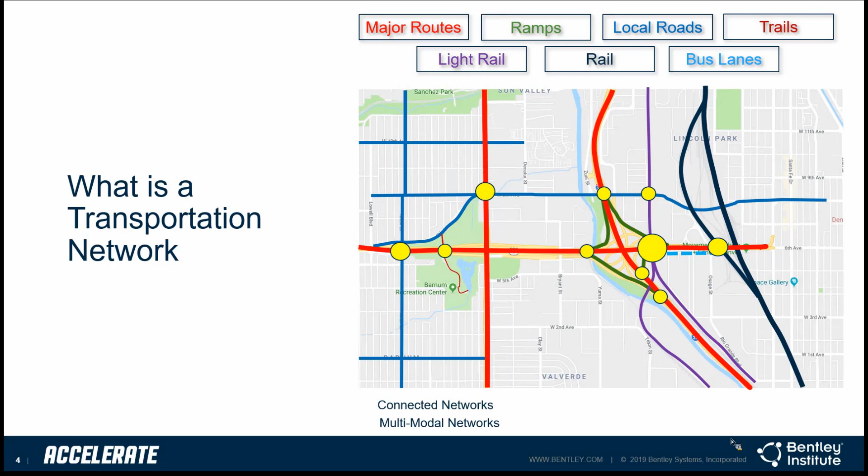So what is the digital twin of the transportation network? It's not just the topography, as you just saw in that map, and it's not just about the CAD model. It's about all of the information that relates to the network. So it's a combination of that network topography and the CAD models, but it's also information such as photographs and LiDAR information. It can also be information that relates to the operational aspects, such as borehole records, inspection records, condition information, and maintenance records. It can also relate to any other information about the status of those assets and information on the network.

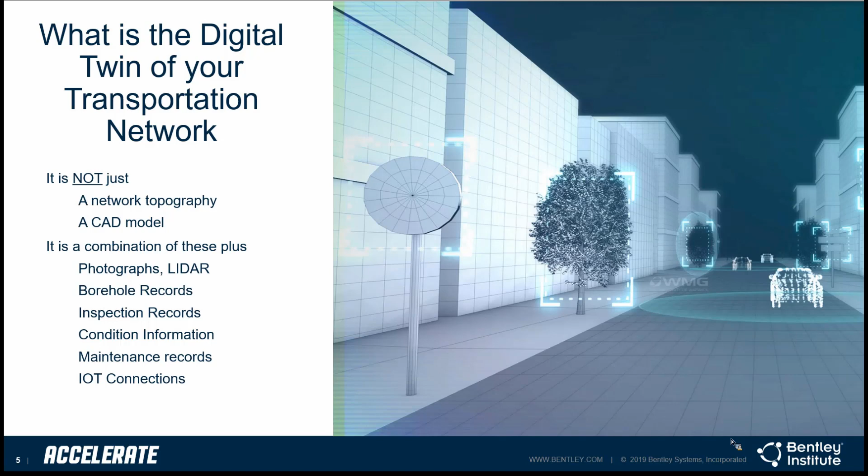That's information that's coming from IoT connections. So in total, the digital twin of a transportation network is any of the information that enables us to make informed decisions about the network and its associated assets.

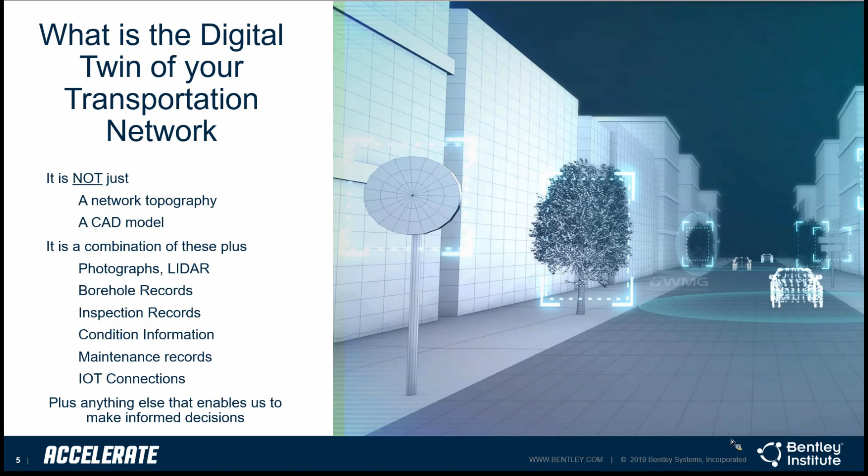So why is that digital twin critical? Well, it's needed to meet the industry challenges that more and more of you are facing. So if we consider things like reporting compliance, so in the developing world, HDM4 for information and HPMS reporting that the US DOTs have to face, this is being able to get all of that information and being able to assimilate it and use it for those types of reporting.

We also need it for user expectations. So as information becomes more freely available to members of the public, we need to increase our reliability. We need increased confidence about the decisions that are being made, and we need to start looking at behavioral patterns, such as the expected lifespan versus the actual lifespans.

We've also got an increased network usage, so there are more vehicles on our roads. Those vehicles are becoming heavier and longer, and there's also increased congestion, which also becomes more visible to the public.

There's emerging trends that are starting to cause challenges. So although ISO 55001 is more about the processes that we should perform, we're also then having to use those processes to start developing asset management plans. And some of those asset management plans are putting more pressure on us to do things like risk-based prioritization and cross-asset optimization, so being able to analyze the data better so that we can do those types of optimization.

So at Bentley, we start with a network. And some of the questions we're often asked is, why can't I just use the centerline geometry? Well, let's look at what the network consists of.

So first of all, the network itself is a complex asset. And that's because it's a network of connected and interrelated assets that work as one. It has numerous characteristics that change along its length, and it has numerous point or linear assets associated with it. So although each of those assets are individual items that we need to manage and maintain, when we put them together, they form the network.

So each of those assets dynamically change continuously along its length. The network itself has multiple connection points to other networks when we look at the multimodal type networks. And the network itself can be referenced in different ways. So for example, we might reference assets as a location from the start of a route, or they might be referenced as a point from a bridge.

And those routes might be overlapping. So in the industry, we refer to those as multiple linear referencing. So you can see we're not just looking at a single asset. We're looking at something which is a whole bunch of information that works together and is complex. So a spatial geometry approach simply can't manage those characteristics like a digital twin can.

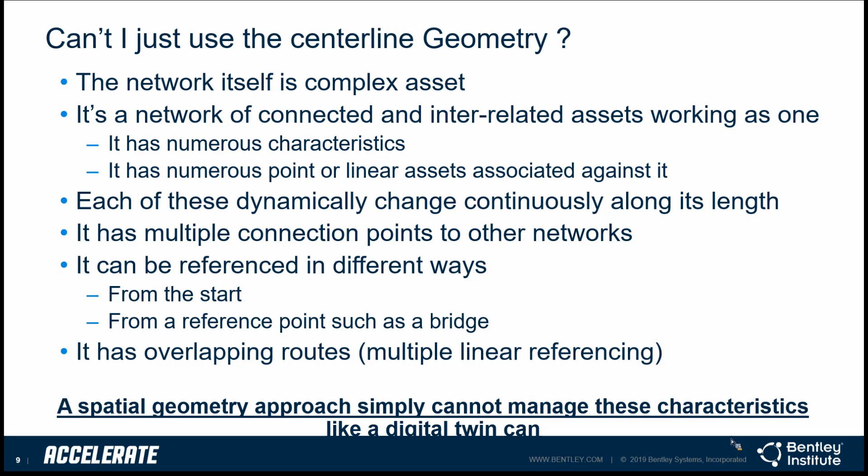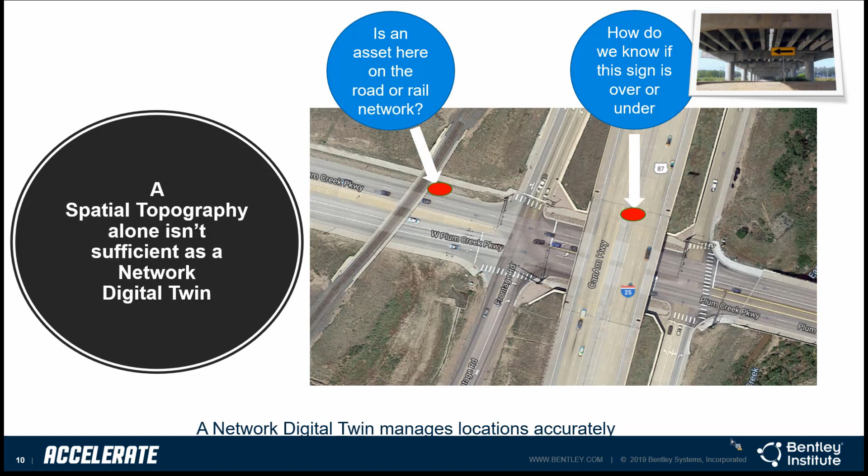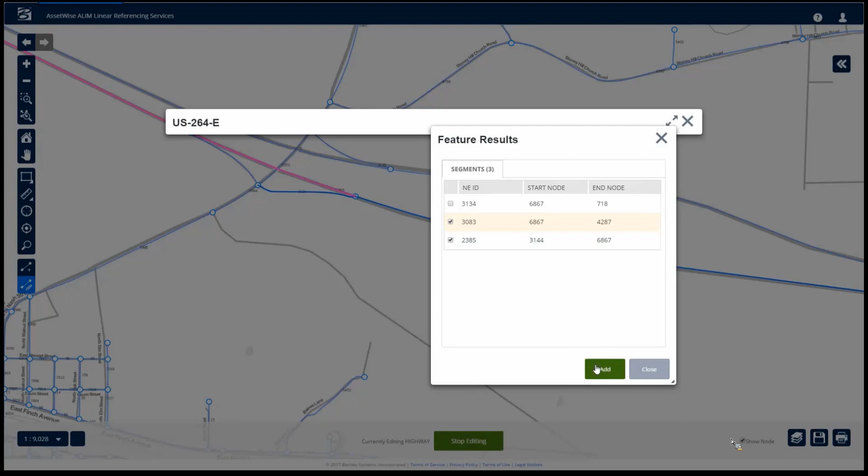We can have overlapping routes on the system, so this is what we refer to as multiple linear referencing. And what the system also provides is the capabilities of performing dynamic segmentation of the network. This is how organizations like Department of Transportation organizations like Oregon DOT can perform their HPMS reporting.

AssetWise linear referencing services also enables us to manage events against the road network. So we can identify information such as speed limits and condition information along the network. It also enables us to manage assets on the network, so we can locate those assets against any route that we want to, and then we can also identify those assets where they exist as what we refer to as cross-sectional positions, so whether they're in the left lane and the right lane and so on. So AssetWise linear referencing services is really where we start managing and maintaining the network.

One of the things I mentioned is that we can also perform dynamic segmentation against the network. So what dynamic segmentation enables us to do is model the network as it exists in the real world, and this starts making that complex network much easier to maintain. For example, if we have a speed limit or a functional class, we can identify that on the network exactly as it exists in the real world. We don't need to identify the smallest chunks of the network to relate that to.

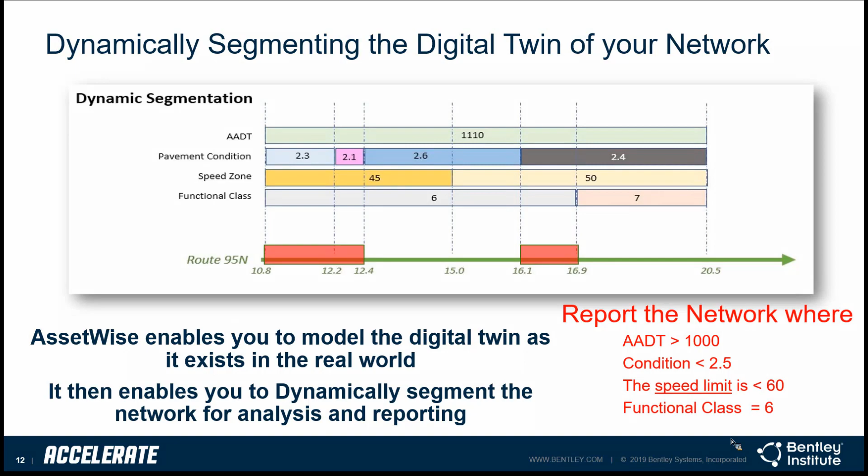Using the AssetWise linear referencing services and capabilities like dynamic segmentation, Oregon Department of Transportation have managed to perform their HPMS reporting. HPMS is a really good example of why you need a digital twin of your transportation network, because what they do is take information from many disparate sources, use the road network to bring all of that information together, and then they're able to extract, segment the road network, and produce both their tabular and their spatial reports.

The AssetWise system has enabled Oregon to reduce their production costs of the HPMS reporting. It's increased the quality and accuracy of those extracts. It leverages corporate asset data from all of those disparate systems, and it's enabled them to provide on-time HPMS submittals for their federal reports.

So we've talked about AssetWise linear referencing services in the network, but the Transportation Network Digital Twin also includes other information such as assets, features, and events on the network.

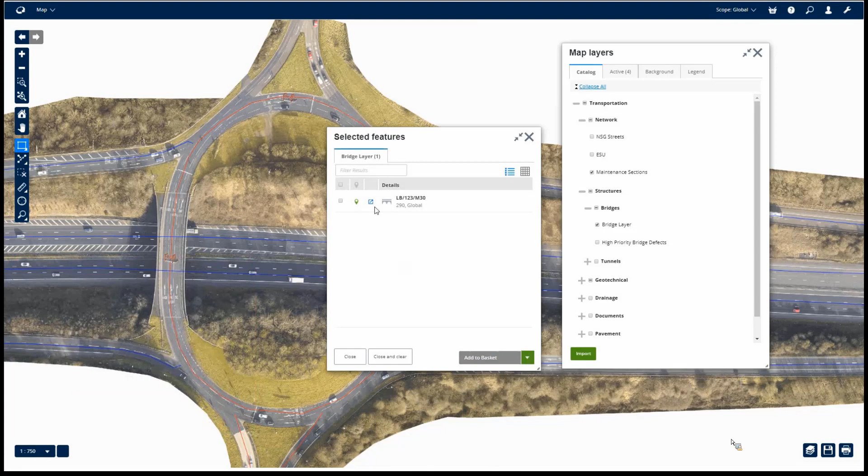Here we're going to see a video of the AssetWise ALIM capabilities. In this case here, the user can select the type of asset they're interested in, and then they can perform a search on the map using the spatial tools. The user's drawn the polygon and identified that there's a bridge at this location. Here's the bridge, and you can see down the left-hand side, these are the components of that bridge, in this case, the multiple decks and spans of that bridge. When the user clicks on each of those components, you can see on the right-hand side the asset information that relates to that.

AssetWise ALIM also enables us to identify information such as inspections and activities or assessments that we want to perform against the bridges. In this case here, as the user clicks through assessments, they can look at all the assessments, or all the inspections, or all the maintenance that's been performed against this individual bridge.

If we select on any one of these inspections, we can see the information that's been recorded, and we can record additional information against those. We can also see the tasks that are required as well.

AssetWise ALIM enables us to identify workflows. So once we've performed an inspection, it tells us what the next piece of the workflow is for us to work through. And once we've identified those tasks, we can also record other information such as the defects and any work requirements that are required to repair that defect.

So AssetWise ALIM enables us to manage the information, the operation information against the assets and the network.

Highways England are using AssetWise ALIM for their structures management. Some of the outcomes of them using that is that it provides them with the ability to perform spatial and network management. It provides the asset information management for their structures and roadway assets, enables them to perform their inspections and work management, and it also provides reporting such as bridge condition reporting.

So in this case here, we can now look at AssetWise operational linear analytics. We can see on the left-hand side information about the network in the map at the top left-hand corner, and information about the network itself. This is time-based information, so we can see information about track conditions over time, and the user can then look at surveys that have been performed.

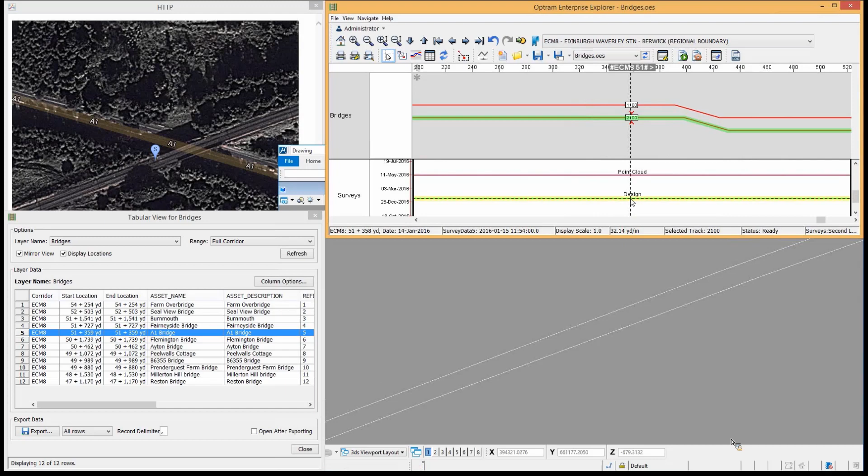By clicking on the bottom left-hand side here, we can see information about the design, and if we are interested in that survey, we can click on it, and through the connected data environment, we can then look at information about that survey in ProjectWise.

We can also associate other information to the network as well. So in this case here, we can now look at the point cloud information that's stored against that piece of network, and we can view that in the map as well. This then gives us some 3D capabilities from that LiDAR data.

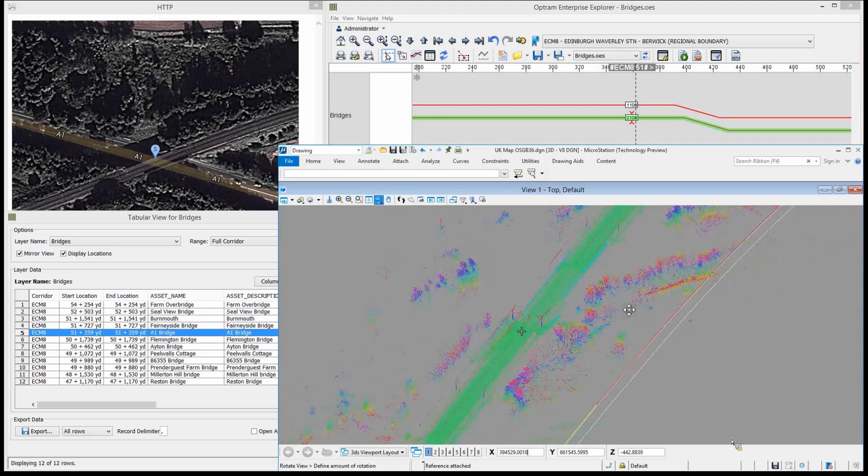Using the linear analytics capabilities, we're able to look at time-based information that's going to enable us to look at conditions and actions that have been taken over time, so that we can then perform analysis against the network to identify if we're making the right decisions. That refers back to the insight that I referred to at the beginning of the presentation.

AssetWise also uniquely extends a transportation network twin to a 3D visualization.

If we take a look here, we can see information about the network, in this case a rail network, and here we can combine iModels with reality data from ContextCapture. So now we have the 3D visualization of the network. We can zoom in, and then we can look at that iModel information with AssetWise ALIM and reliability information.

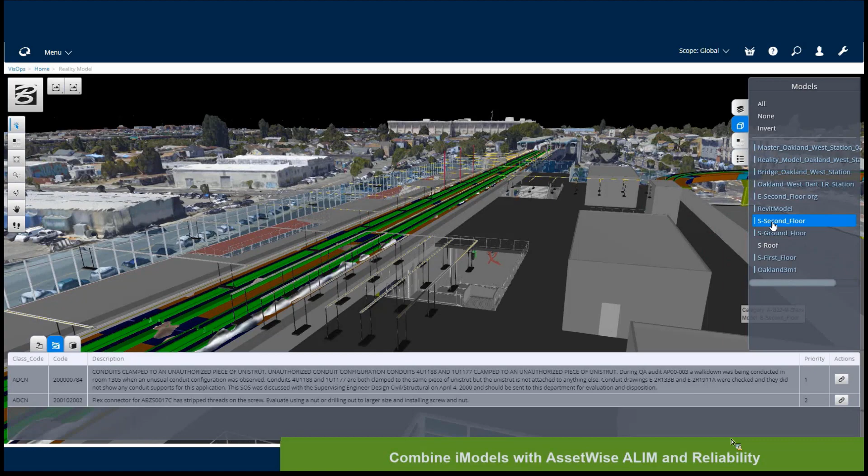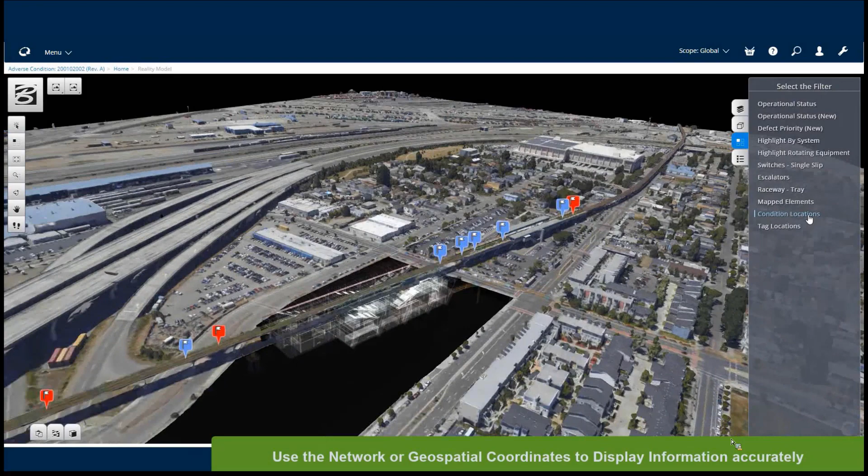By clicking on any of the features inside this iModel now, we can see information down the bottom of the screen that relates to the AssetWise ALIM information. This can be information about the operational aspects, inspections that have been performed, or any other asset information that's available. And because all of this information is also related to the network, we can then use geospatial coordinates to display that information accurately within the 3D digital twin.

On the right-hand side, we can see the information that relates to that.

So in general, what we've just gone through today is really how the digital twin of the transportation network enables us to manage all of the aspects of the network. It's information about the network itself, all the information that relates to it, such as operational information as well. And then when we start displaying that in the 3D context, we have all the information that enables us to provide improved decision support.